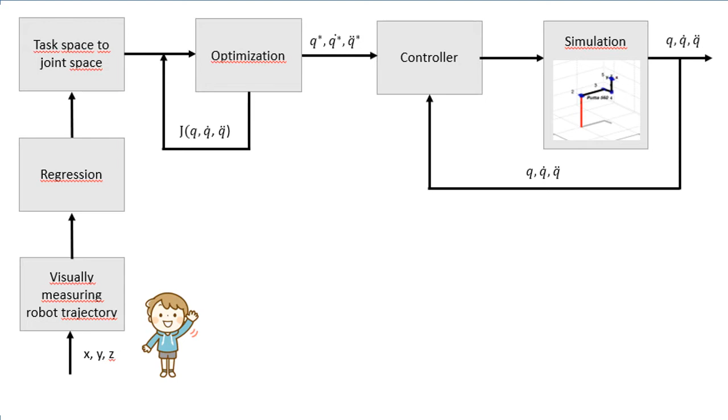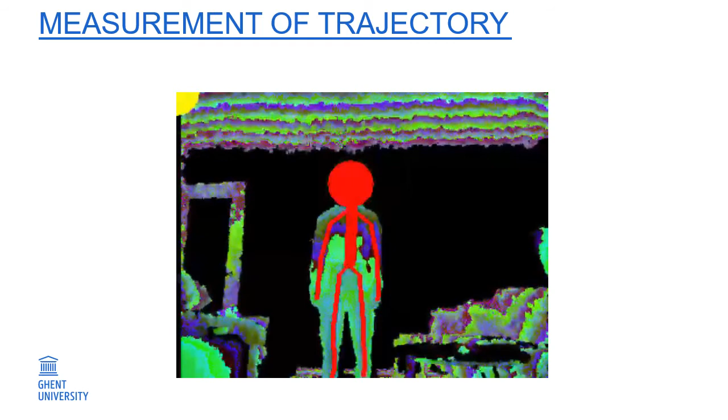Now we will show you how we measure a trajectory. With an Xbox Kinect, we track the position of the shoulder, elbow, wrist and hand of the moving arm. With the help of Python and MATLAB, we then can create this plot. The shoulder is the origin of the plot, and the green dots are the elbow, blue the wrist, and red the hand. We can already see that there's a lot of noise on this data.

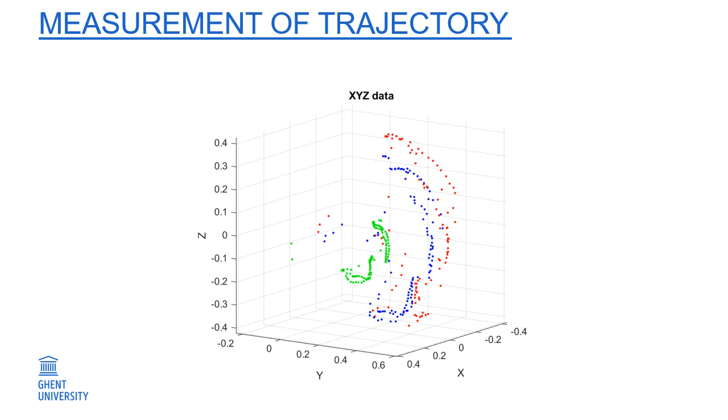Definitely over here, we can see data points which don't contribute to this movement. For this reason, we will have to clean up this data, and this will be done with the regression. The regression on the raw data is done to get a smooth trajectory. This is needed for determining the velocity and acceleration, as we will use forward differencing on the position for this. On the graph below, you can see that the curve has become a lot smoother after regression.

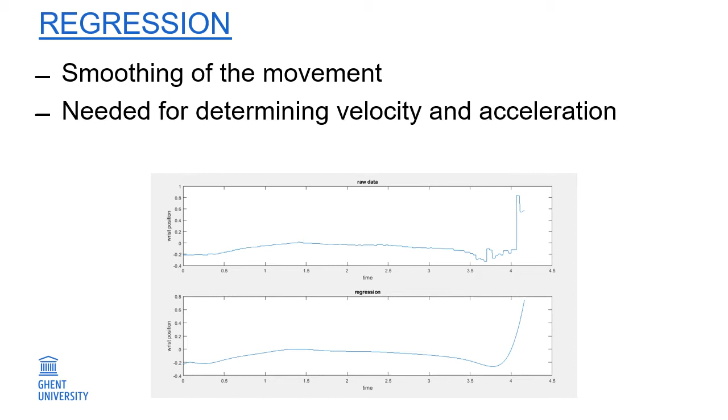Our robot model represents a real human arm. A human arm has 7 degrees of freedom. The first 3 are in the shoulder, 1 is in the elbow, and the last 3 are present in the wrist. So, our robot model also has 7 degrees of freedom. Each degree of freedom is represented by a cylinder. In order to perform calculations, we define some physical parameters of the robot. Those can be seen in the table on the left. We also calculated the inertia, as well as the center of mass of the links.

Now we will look at two important kinematic functions: forward kinematics and inverse kinematics. Forward kinematics allows us to go from joint space to task space, meaning if we have the joint angles, we can calculate the XYZ coordinates. This is done by using the Denavit-Hartenberg matrix. We can construct such a matrix for each link between the joints. When we then multiply these matrices, we get the XYZ coordinates of the end effector.

Inverse kinematics does the opposite. It goes from task space to joint space. The calculations are quite difficult, so I won't discuss them here. Imposing the constraints of the joints of a real human arm, we get a solution for the joint angles. The joint velocities and accelerations, on the other hand, will then be calculated by forward differentiation.

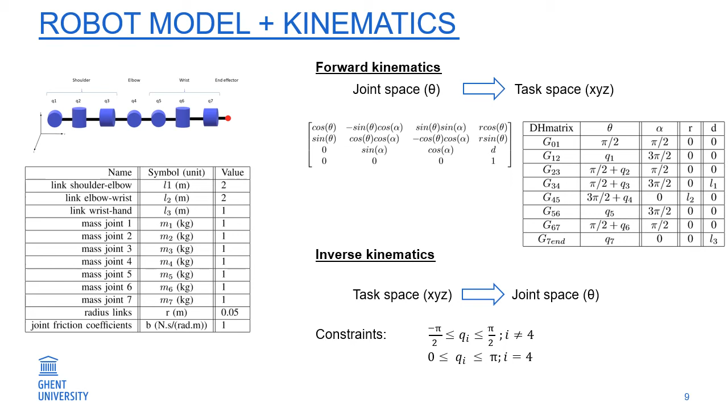After determining a feasible trajectory, we will now determine an optimal trajectory. For this, we want to punish torques, which is equivalent to punishing accelerations, but we also want to stay as close to the original movement as possible, as this is the task of a robotic arm. On the right side, you can see here an expression for the cost function. We see one term which punishes accelerations, and one term which punishes deviations in the position and velocity from the initial trajectory.

Here you can see the result of our optimal trajectory, and we can see that the accelerations in the optimal trajectory have decreased significantly, while still respecting the movement of the robotic arm. We can thus call this optimization successful.

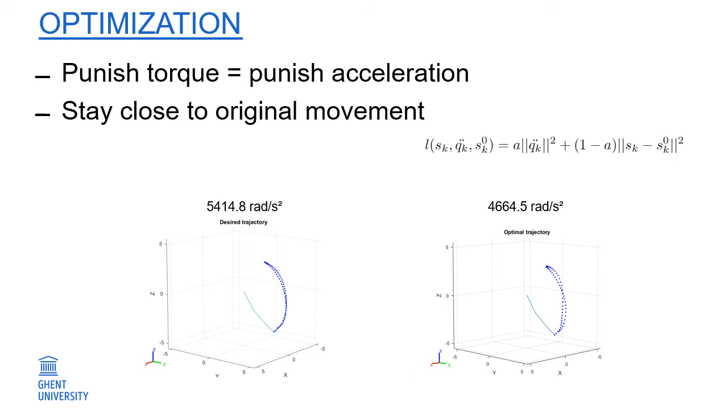Computed torque control has been chosen to perform robot control. Therefore, a desired actuation torque is required to be applied to the joint motors. Starting from the equation of motion, actuation torques can be calculated based on desired joint positions, accelerations, and velocities. We can see that this equation contains an inertia term, a Coriolis and centrifugal term, and a gravity component. Going from joint motion to joint torques is called inverse dynamics. Because calculating the inertia matrix and centrifugal and Coriolis component is mathematically impractical, the recursive Newton-Euler method is chosen to calculate the torque.

Going from joint torques to joint motion is called forward dynamics. In forward dynamics, we use some interesting characteristics of the recursive Newton-Euler algorithm to calculate the inertia matrix, Coriolis and centrifugal term, and the gravity component. Since we now know all components in the equation of motion, this equation is now used to perform forward dynamics.

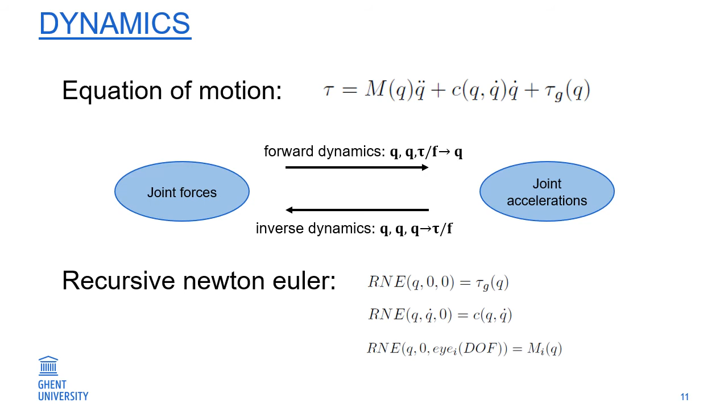The functions that have just been defined will be used in the control scheme. The chosen control is computed torque control. This control will feed back the real measured movement and velocity of the robot and calculate the error with the desired one. This error signal is then multiplied with a constant and added to the input torque of the robot.

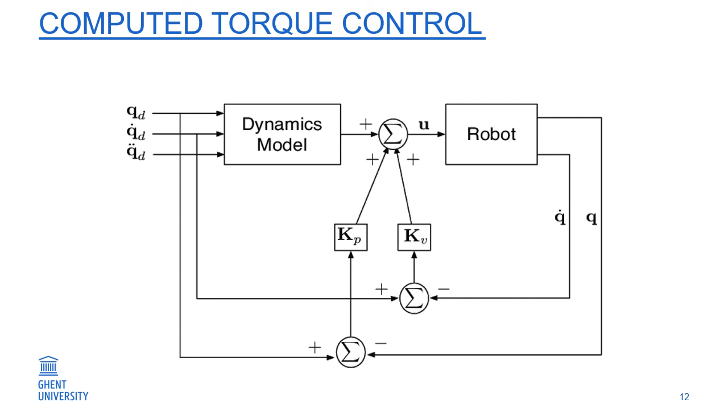Simulating the real-life robot is done with forward dynamics. This indeed converts the applied actuation torques to the joint motion. Performing inverse and forward dynamics after each other would lead to a perfect reconstruction of the joint motion, and the control scheme would have no effect. In reality, modeling errors are present. In order to implement these errors in the robot simulator, some model parameters are changed within the forward dynamics function. Implementing computed torque control on our robot has led to the following control scheme.